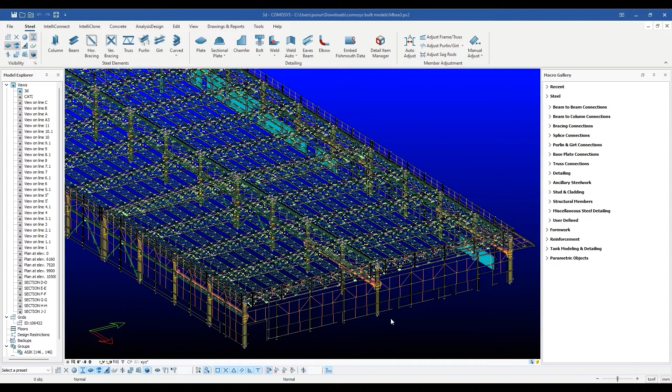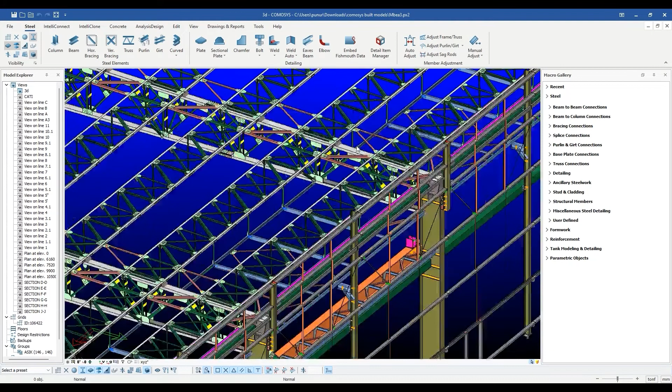Creating complex 3D models is all about creating elements and modifying them. Modification of existing elements starts by first selecting them and then doing something with them. So the way to modify any model has two fundamental steps. Number 1: select the elements. Number 2: do something with the selected elements.

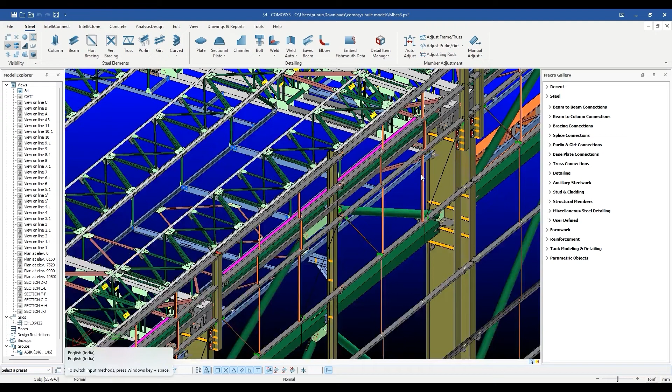This might seem trivial, but being able to select exactly the elements you want in a complex model can be extremely tricky and time-consuming. Most programs handle selection issues by using selection filters. COMOSYS 2 has extremely powerful selection filters, which will be explained in another video, but they are very detailed as can be seen.

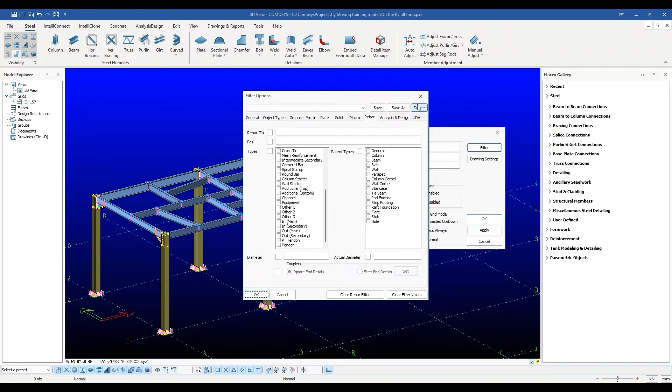While they are absolutely essential, it cannot be denied that setting up a filter to get the results you want will take quite a few clicks. Since selection is at the heart of almost everything, we have developed on-the-fly filters, which are extremely fast and serve the user well for the most common filtering requirements.

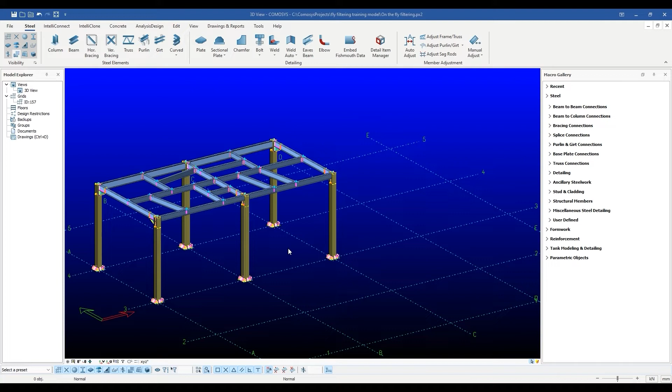This on-the-fly filtering for selecting only a certain type of object is triggered by simply doing a window selection and pressing Enter. If more than one type of objects are selected, COMOSYS will group the selection into subtypes in this dialog box. As you can see, the frames, plates, bolts, welds, cuts, rebars, and even macros, etc., have all been grouped here on the left.

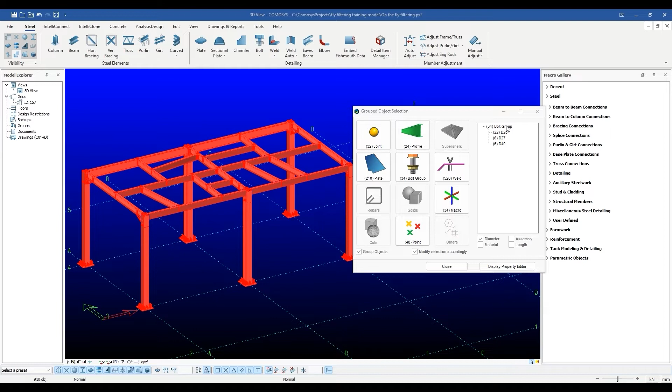So let's say you only intended to select the bolts. You just click this bolt button, and a second level of filtering options will be created in the pane on the right side of this window. As you can see, while if we wanted, we could simply click the topmost line on the right pane to select all the bolts, we have been given the opportunity to fine-tune our selection by selecting bolts of any particular diameter, if we wanted to.

And that's not all. On the bottom side of the right pane, you have further options. As you can see, you can select other bolt properties like material, assembly, and length. The grouping is recalculated depending on which check boxes have been ticked here. This type of on-the-fly filtering is extremely powerful and time-saving.

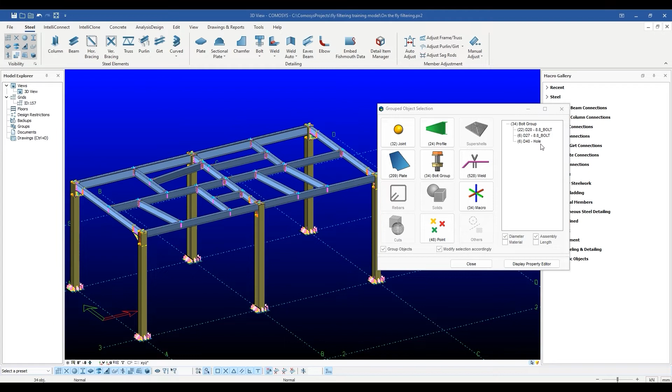Once you have the desired grouping, simply double-click on the group line, and the initial random window selection will be filtered to give only the results you are interested in. Once the desired objects have been selected, the dialog box of that object type opens, and you can make whatever changes you want.

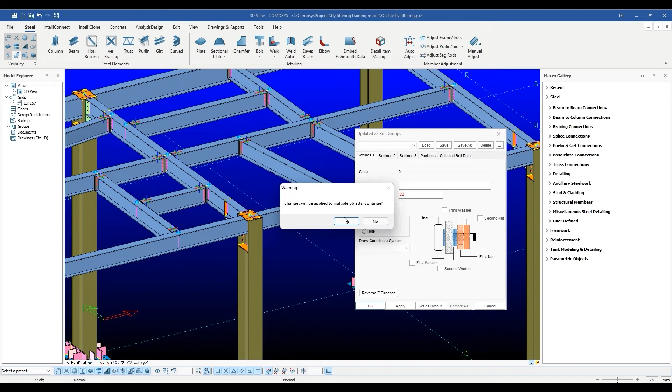It should be mentioned here that the dialog box will show all parameters as empty except those which are common across all the selected objects. When you change one or two parameters in the dialog box and press OK, only those parameters will be changed for all selected objects and the rest will remain untouched. This is exactly what you want.

The same grouping is available for frames, plates, welds, rebars, cuts, and other objects. Each object type will have its own most frequently used grouping options in the window pane on the right. The frames, for instance, can be grouped by profile name, beam group, material, etc. Welds will be grouped by size and weld types. Plates will be grouped by thickness, material, etc. Rebars will be grouped by diameter and other parameters.

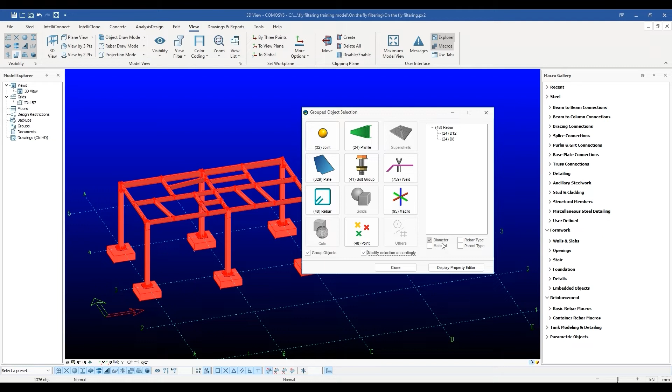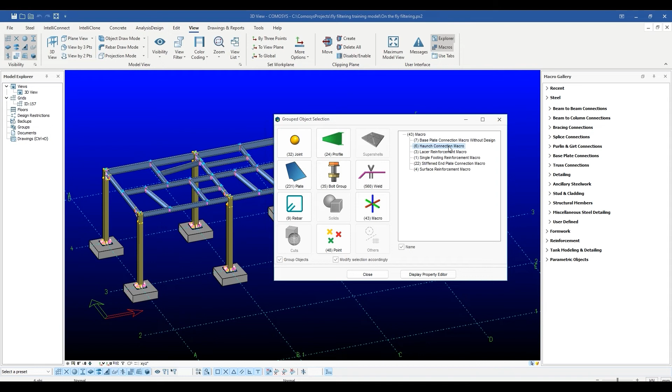But perhaps the most useful is the grouping of macros. As you can see in the right pane, the selected macros have been grouped by macro type by default. There is no other grouping at this level. However, once you double-click on a particular macro type, a third window opens, which allows the user to further subgroup that particular macro. This subgrouping is extremely useful, and this kind of filtering is not available in most commercial programs.

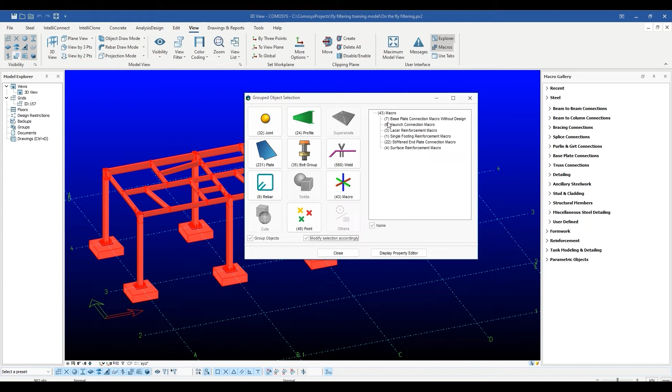As you can see, the macro type selected has been subgrouped according to its main and secondary members. So for instance, if you choose the stiffened end plate macro, all instances of occurrence will be grouped by COMOSYS according to groups in which the main and secondary frames are the same profile. And that's not all.

At the bottom you can see a further grouping option by approach angle. This is even more revolutionary, and makes the job of modifying the model extremely easy. Here the stiffened end plate macro instances are further subgrouped according to the approach angle of the secondary profiles.

So all instances where the secondary is approaching from an angle of 90 degrees will be grouped together, whereas those approaching from other angles will be grouped in their own angle ranges. This angle range is customizable but 5 degrees by default. So all instances where the approach angle of the secondary is, say, between 40 and 45 degrees will appear as one group line.

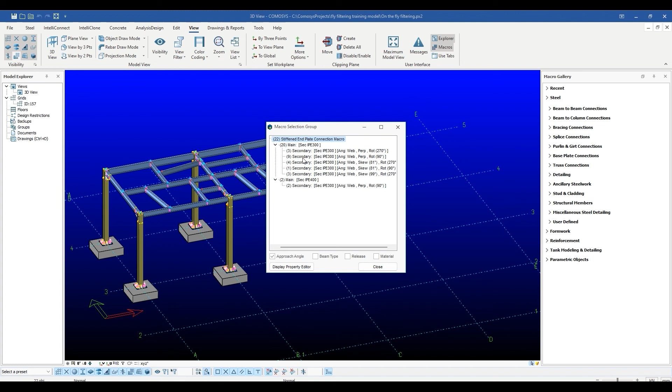The dialog box for only those instances of the macro would open. And now you can simply change the thickness of the end plate, or some other parameters as you want, and press Enter. The more you use it, the more you will realize how much time on-the-fly filtering saves you.

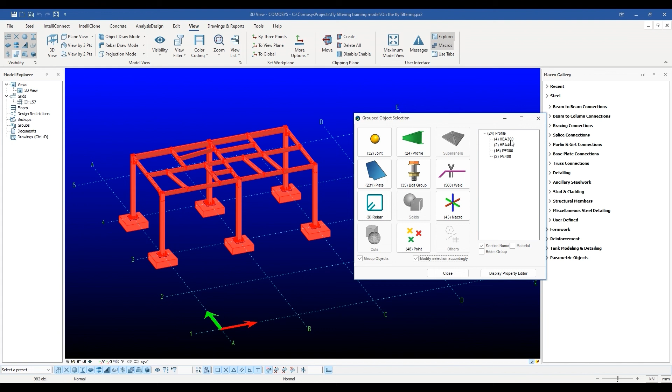It's not that these things are impossible to do in other programs. It's just the number of clicks it takes to do them. Doing the same thing with 6 clicks as opposed to 3 means finishing the job in 2 months rather than 1.